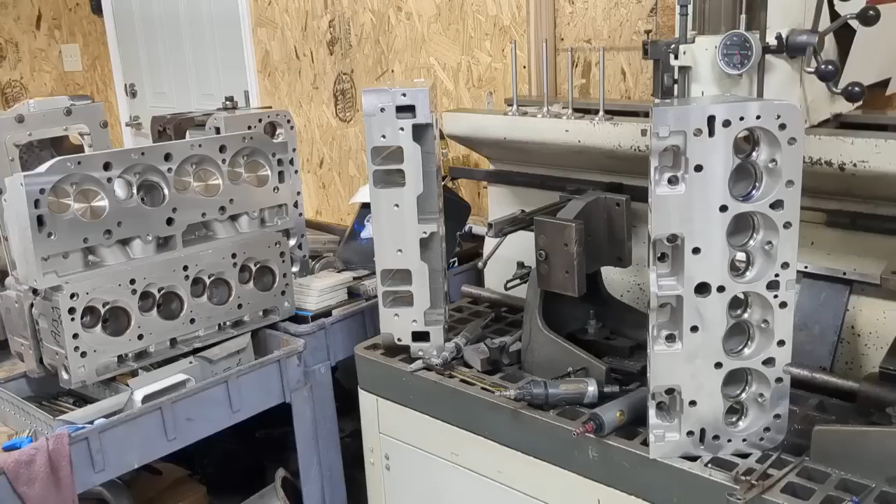This is Brian Salter here with Salter Racing Engines, and today we're going to be talking about getting serious about making horsepower. And the topic of the day is going to be cylinder heads, but mostly about the heads. We're going to be talking about valves and valve seats, and we're going to do this in a series.

Sorry about the crooked camera. I am shooting this video by myself, so I will be back and forth hitting the pause button probably.

But serious about power. Boy, I'm going to tell you, being in this business for 30 years and doing NASCAR motors, you see it all. And I have heard some stuff in the last couple of days on the internet that has just blown my mind. I think people are getting big with YouTube but lack the actual real world experience. And today I'm going to show you some stuff that's going to be very simple but yet make big impacts on performance.

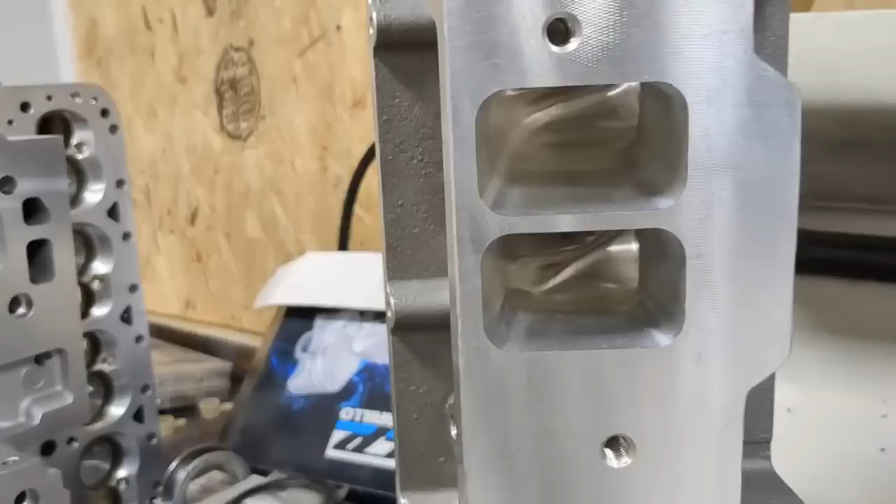I watched a cam video the other day, and man, okay, well, I got videos coming. This is gonna be part one. There'll be multiple videos in this series. So how do you get from something like this, or how do you get to something like this? Let me word it that way. You know, when you buy something off the shelf for a budget, you get something like this.

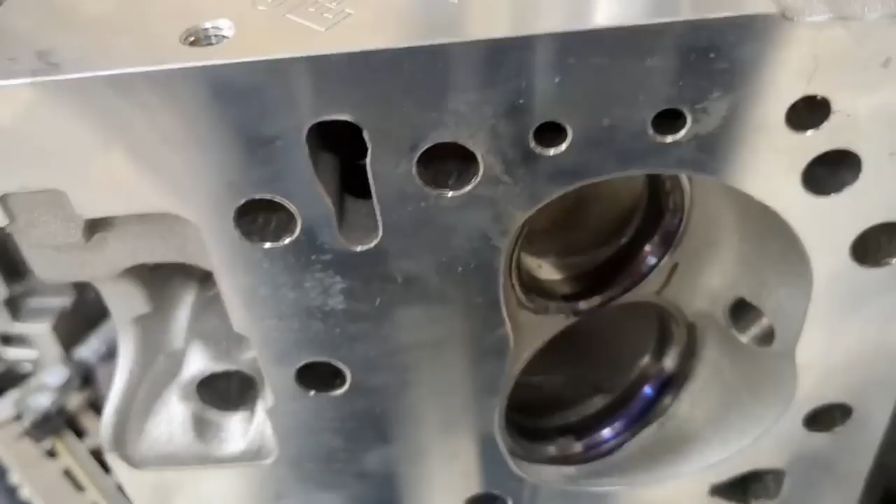After all these years, I have my own CNC programs. This is an Edelbrock E Street for a Chevrolet, by the way. I also have some for Fords, some cup stuff for D3s, big block stuff here. I've got a smorgasbord of all kinds of stuff.

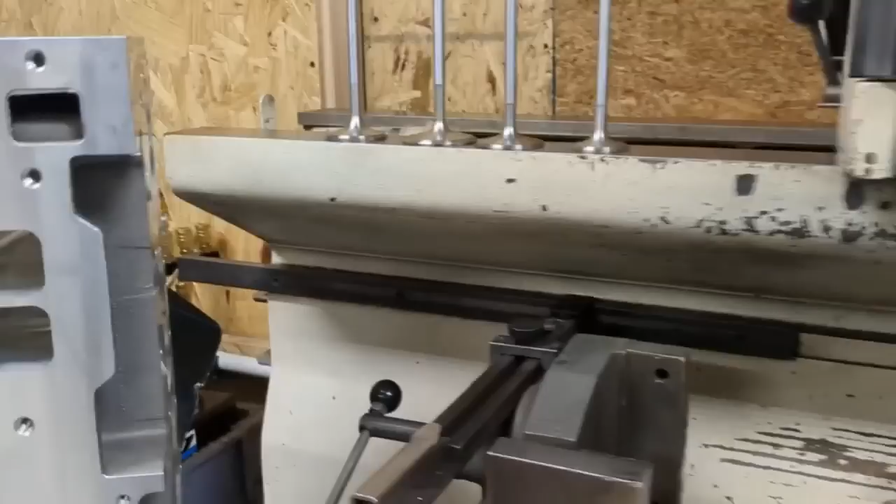I've got engines to do, nine engines right now, and obviously cylinder heads are part of that. So I'm going to show you some tricks of the trade, and some things you need to pay attention to, and some things that don't matter.

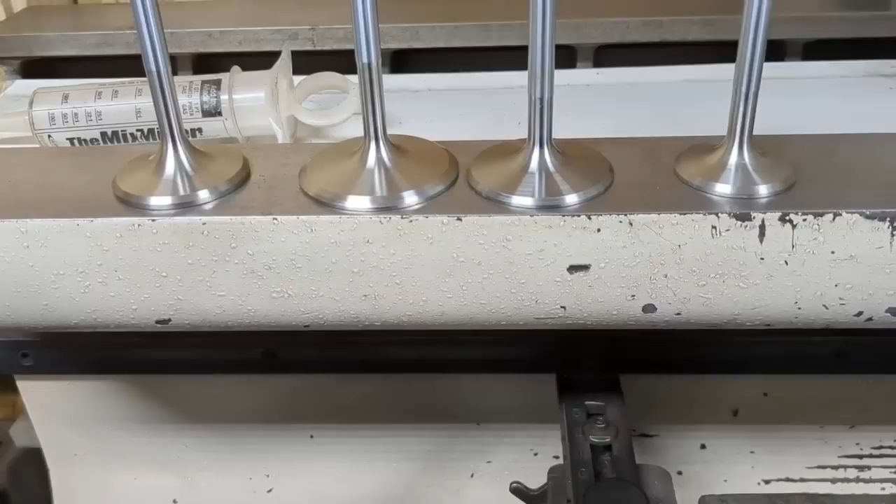We're going to start off with number one. When you talk about cylinder head porting, I'm going to give you a very good wise tip, okay? Because I've been porting heads for more than 25 years. Let me ask you a question: are you porting heads to the engine, or to the valve that's in the head? And the valve that's in the head, is it put there due to the size of the engine? Is it as big a valve as you can get in the chamber? What's the reason and the point behind your valve size?

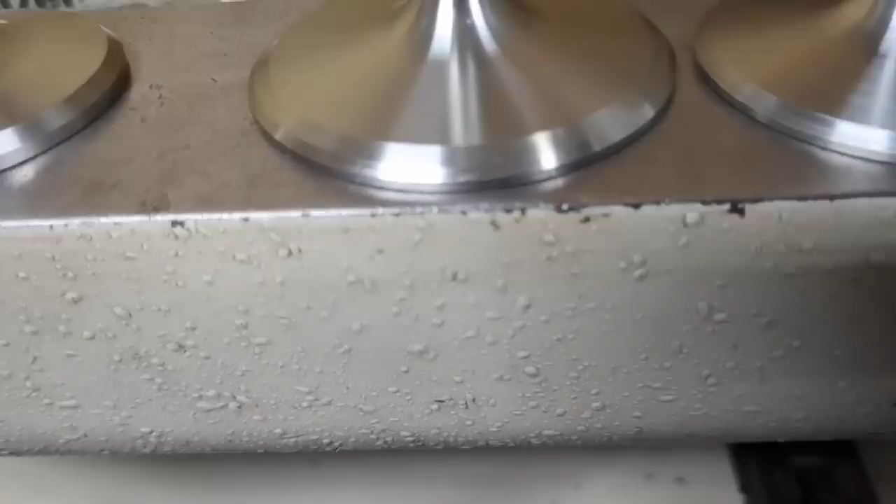These are questions I want you to ponder on. Do we do a back cut such as this one, or do we not do a back cut like that one? Do we do a 12-degree face angle like these two, even on the exhaust? Or do we do the tulip style exhaust with a much steeper exhaust angle?

Well, hopefully after this video you can make some better choices.

Now keep in mind, in order for me to take something like this that you buy from Summit or whoever, Jegs, Summit, EPW, or the guy off the street corner, wherever you get these from, how do you go from this to this?

And the answer is, if you've never done that kind of work, you don't. You have to hire someone. And if you've got to hire someone, you're talking mega bucks, okay? And mega bucks being $3,000 to $4,000, and I'm talking work, labor.

So if you were to buy a set of race-ready, all-out heads from me, depending on the head you bought, it could be anywhere from - this would include completely assembled, all titanium components with shaft systems - anywhere from $8,000 to $15,000. Then you've got to get an intake. If the intake is going to be all-out like the cylinder heads, you're looking at probably $3,000. So now you've got nearly 15 grand tied up in a small block, just the heads and intake.

And the only thing about it is, if you get it from me, you know that it works. It sets records, it wins races, because that's what I do. That's what we do. That's our goal. I build engines for a purpose.

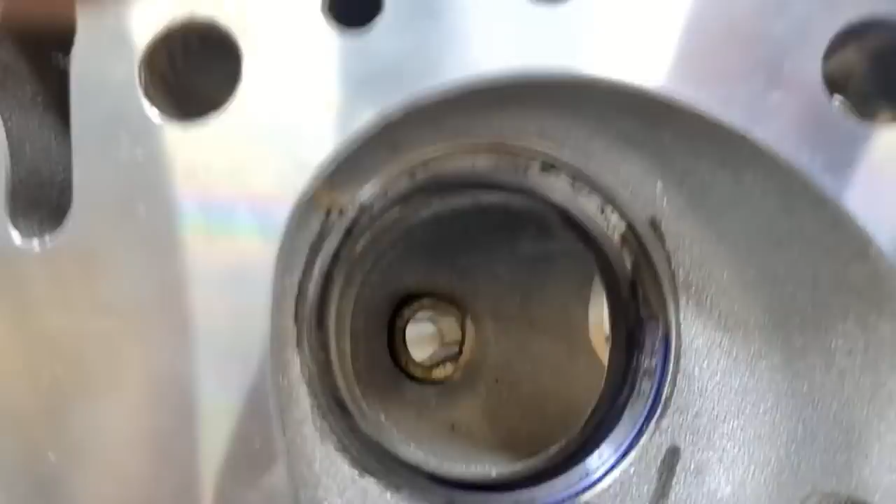Notice the casting, everybody's seen stuff like this before. And there's this Cosmoline and packing grease, all that junk still in there. Brand new stuff here. All right, so these things got potential, no doubt about it. They got potential.

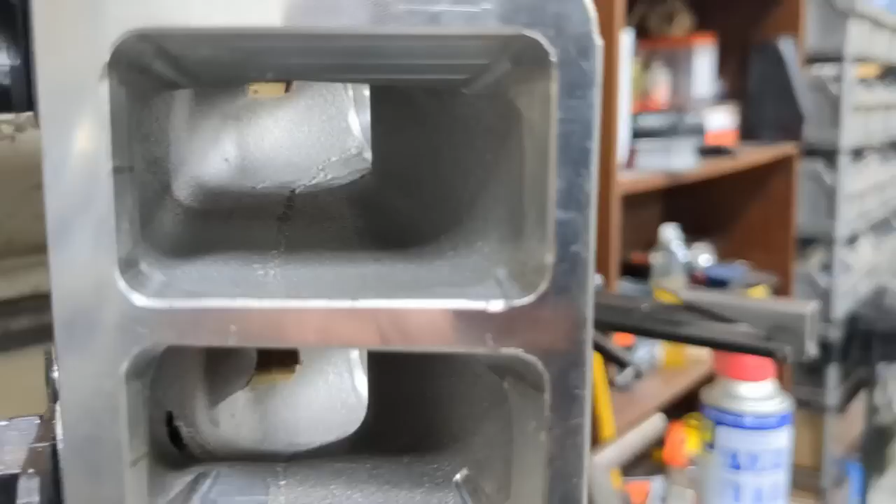And here, Edelbrock has CNC'd the entrance only, of course. This phone is really struggling to focus on that 3D look. There we go, you can see it's just barely CNC'd on the entrance. It's kind of a gasket profile type deal, and that's it. You don't even have very little push rod clearance, all that jazz.

So what's wrong with it, how will this head do? Well, this head will do great if you're trying to stay between 300 and 400 horsepower like it sits. Now, obviously, guys, you can push the limit, really crank the compression and run a different fuel, and you can get more than that. But I'm talking about easily building a 300 to 400 horsepower street engine very easily with this thing just the way it is. Very easy.

What are some problems with it? That's what I want to point out to you. All right, problem number one, let's look at the seat, right here. This is a problem. This will cause shrouding of the valve.

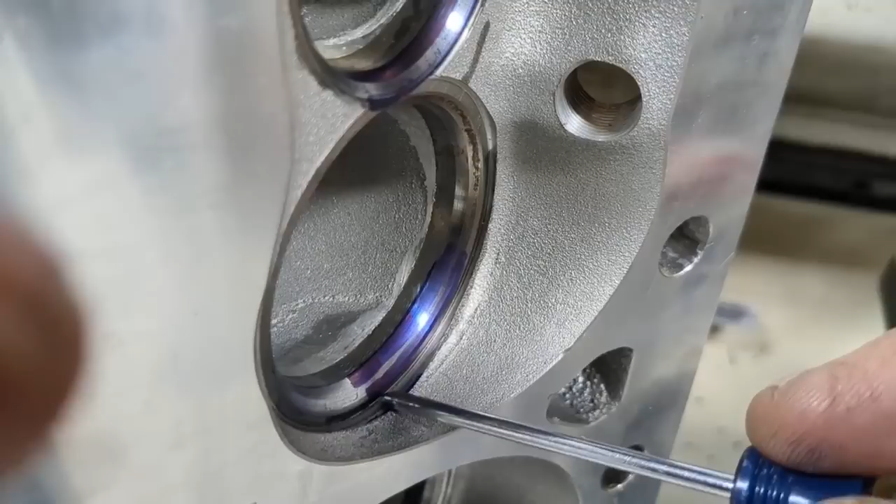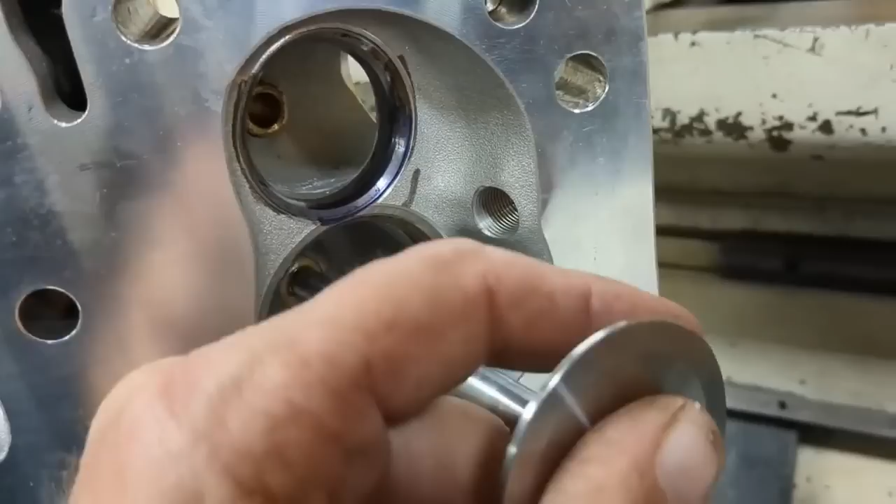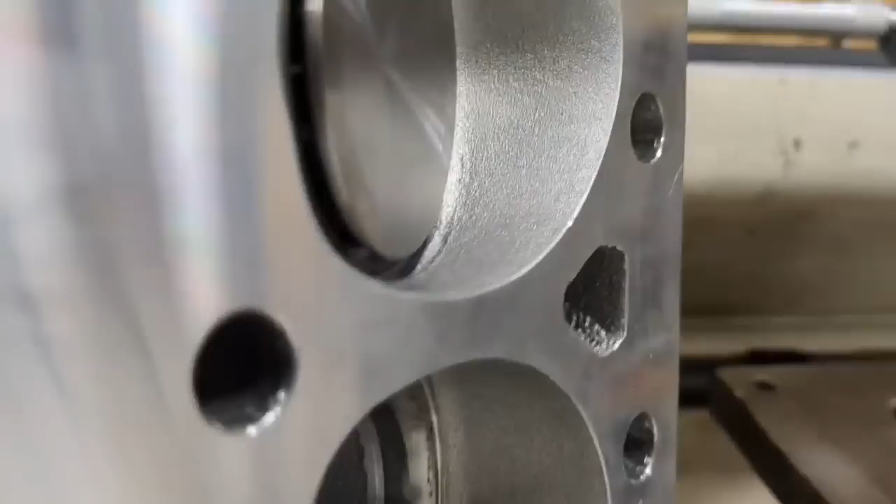Now, what is shrouding of the valve? Well, I showed you shrouding when we did the little piston video a few days ago, or however long ago it was. Let's put a valve in here. I still got the seals in them too, so they're a little stiff. Shrouding - let's just crack this open here. All right, let's get a bird's eye view.

So there's shrouding. That's some shrouding for you. What does that mean? It means it's blocking your flow.

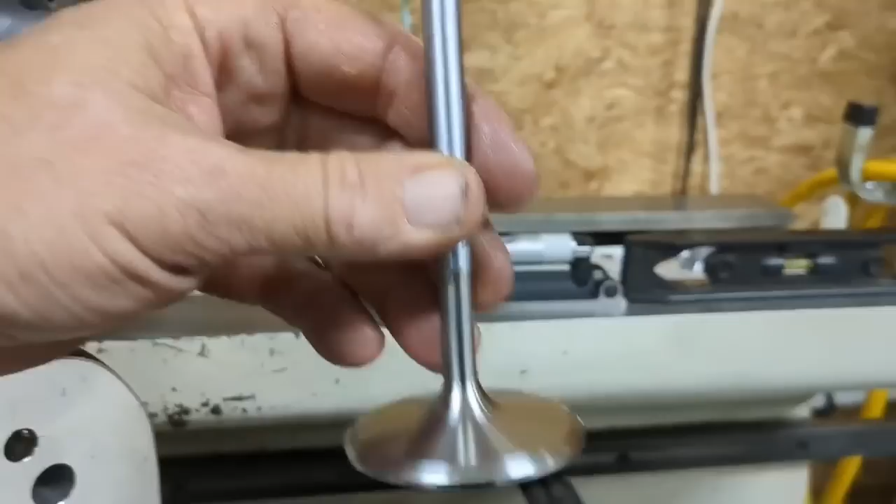It's blocking your airflow. One of the things I learned as a young man doing this was, before I got a flow bench, I would take these valves and put them underneath. I'll show you here briefly. Again, I did not have a flow bench. This is when I was young. I would take these valves and put them in a parts washer, clamping them with one of those flexible wand things you can tighten up to hold its place.

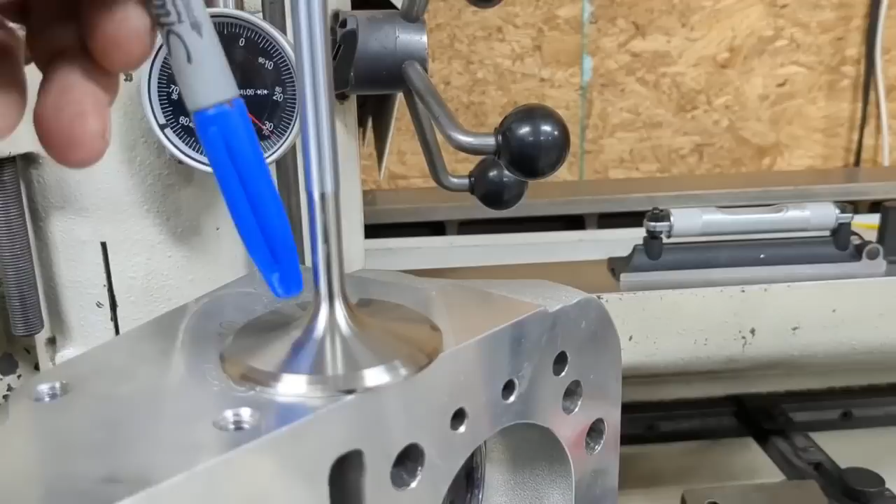I would clamp it in the stream, and the stream would be flowing. It would catch it about here and come straight down on the valve. I would see how the flow would kick off the valve.

Now pay attention here, because I'm about to enlighten you, because I know right now you think I'm crazy. This is stuff I did at 19 years old. So I had this in the parts washer stream, and my parts washer at the time was a metal tube with a pretty thin stream. It was really good, really consistent. I'd put the valve in there and watch how the spray would come off of that valve.

Because remember, what's blocking your flow? The valve. The valve is in your way, and that valve is very critical, very important. Let's set this up here, maybe we can see a little better.

Okay, so the stream would hit this valve face, right here on the stem, and I would watch it as it came off. I got to where I would grind these valves with different angles, different back cuts, different margins, so that the stream, instead of coming way out wide here, would actually wrap around the valve. I'm not kidding you. At 19 years old, I had my own valve grinding angles so that stream would literally come straight off the valve.

Now, at 19 years old—and again, I enlisted in the Army before I graduated high school, so by then I was in the service, but this was always my passion. I was working on people's cars. Whenever we could, there was a lot of hot rodders in the Army, and we would go to grudge race each other and that kind of stuff, because the division had between 15 and 20,000 people, and there were lots of young guys with hot rods.

So we'd have grudge drag races, and everybody was coming to me to fix up their car, or everybody bet their money against the other guy. Of course, when you didn't make any money, it was kind of important to win. So these are little tricks I picked up. I was grinding valves based off of the flow I got off of that parts washer. That was my test. I didn't have a flow bench, and I could not believe the results I was getting.

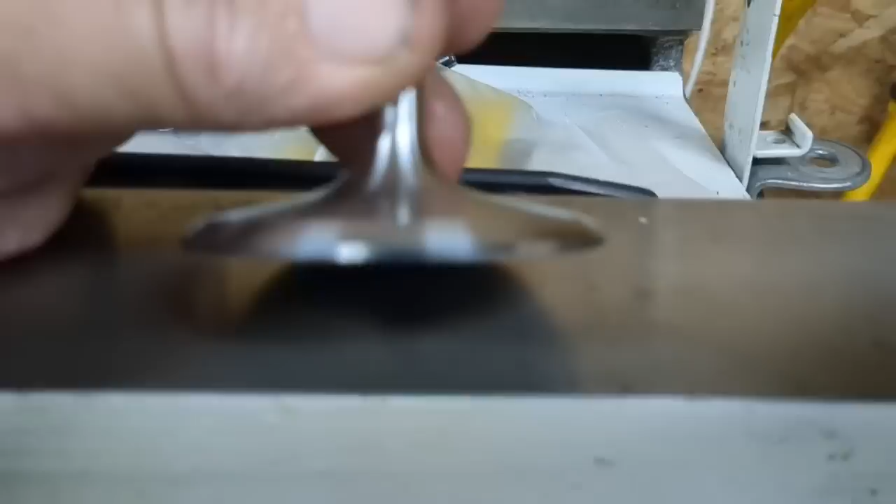And here's what I found. I found the margin—oh, I'm sorry, that's not focusing. Man, that irritates me. Okay, there we go. I found the margin was critical. Where is it? There it is. This is the margin right there. I just painted it.

That is the margin. That is a straight down part of the valve. It comes down right underneath the seat. I'm sorry, I'm moving, I'm trying to be still here. That's your margin, and that margin thickness would change my flow. But it also would change how well the heat conduction took place, and I'm going to talk about that in a minute.

So then you have the seat, the actual seat angle on the valve, which is the part that actually seals when the valve shuts. That's this one right here. Everybody see that one? This particular valve you're looking at is on a 45-degree seat, which is fairly standard for, you know, mediocre to fairly high-performance engines.

A lot of race engines are at 45 degrees. It's a good safe angle because with a really stiff valve spring, it's less likely to pull the valve up in the seat and cause it to tulip, which would end your day badly. But there are better angles—for example, 50 degrees, 52, 55, that type of thing. So you get the idea. Now, on top of that angle is what we call the back cut, and it's right here.

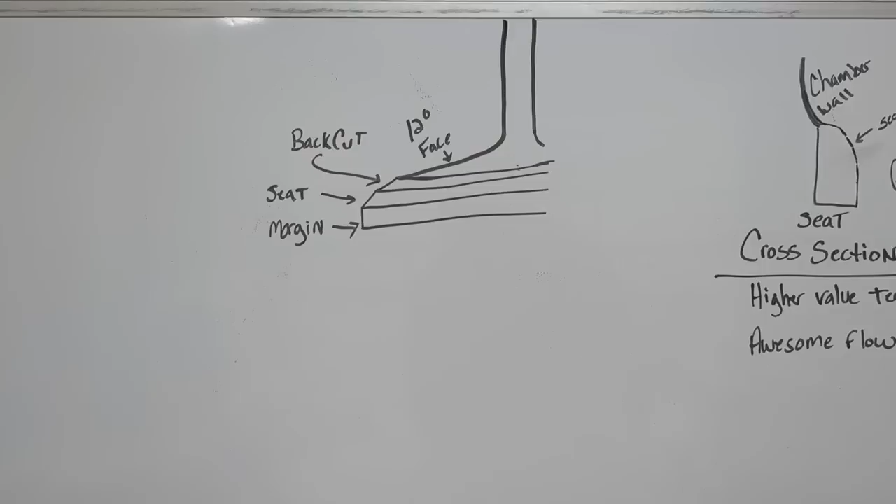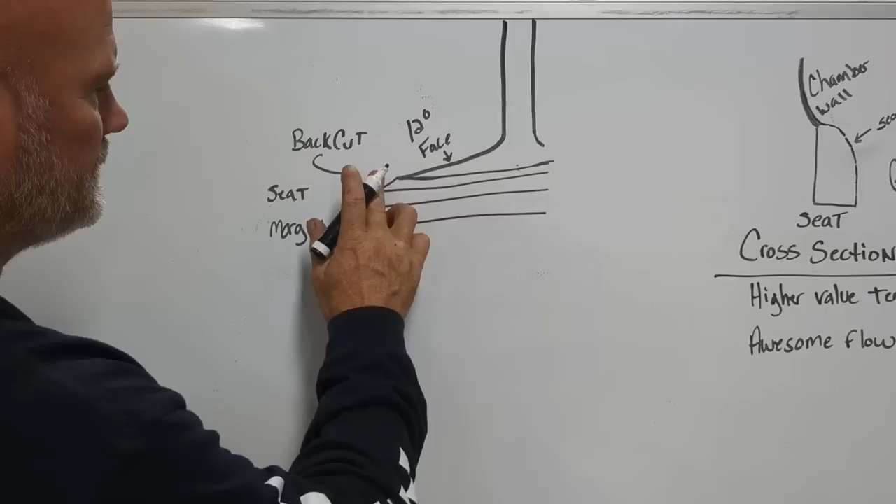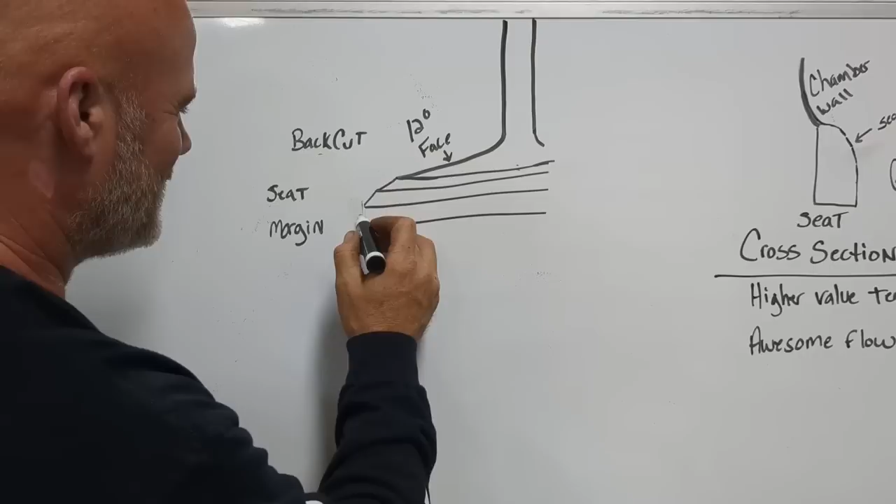So why is the valve the size that it is? Here's a better drawing to make it easier to understand. Your margin - let me move these arrows out of the way - you might want your margin to look like this. Nah, that can't be that crazy. But you might want them to look like that. I don't know, you might just want them straight.

Or heck, you might not want any margin at all. Like some of these modern cars don't have any margin at all, it's just a seat angle and there's this little tiny, hardly immeasurable margin, right? And I'm telling you right now, there's something there to be had, okay? You say, what is it again? Low and mid lift flow. When I change this, say from a 45, and my low lift numbers are not what I want, there's work in that margin to be had, okay. I'm not going to tell you what to do. It took me a little bit to find it, but I'm telling you where to look.

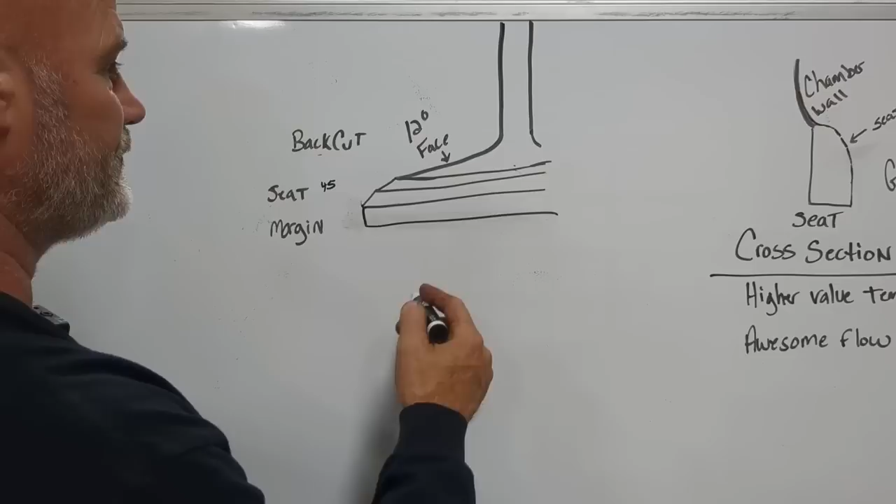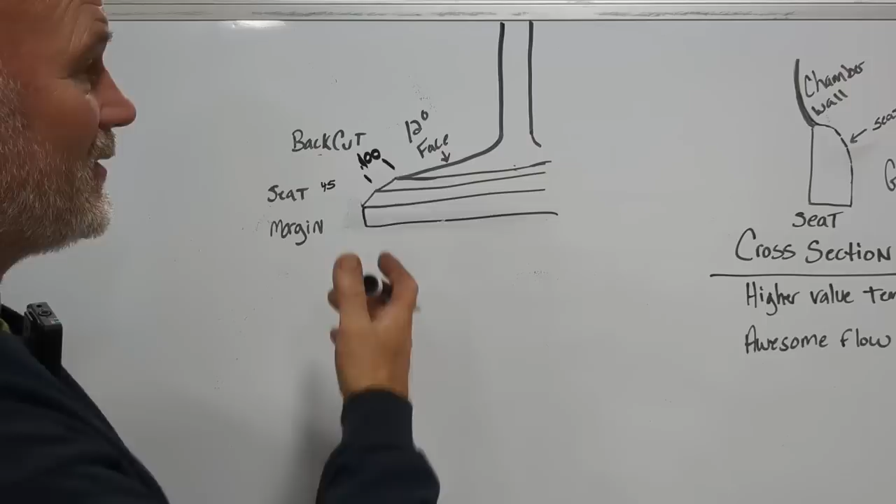This 12-degree face angle is great, don't mess with that. This back cut, I never go more than that, and sometimes I don't go that much. A lot of times I don't go that much, okay. 45-degree seat, 50, 52, right there you're going to pick up your high lift flow numbers, and you're going to lose some low sometimes. And if you do, you can get it back with a margin, but you got to work at it.

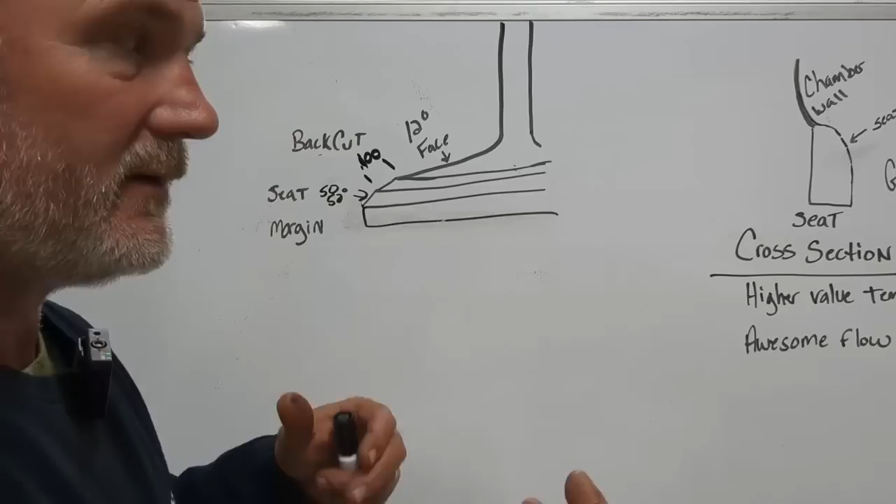Now, I want to show you another thing that's a big deal, good and bad, and the difference between a head that I do and a head that you buy out of the box. All right, here we go.

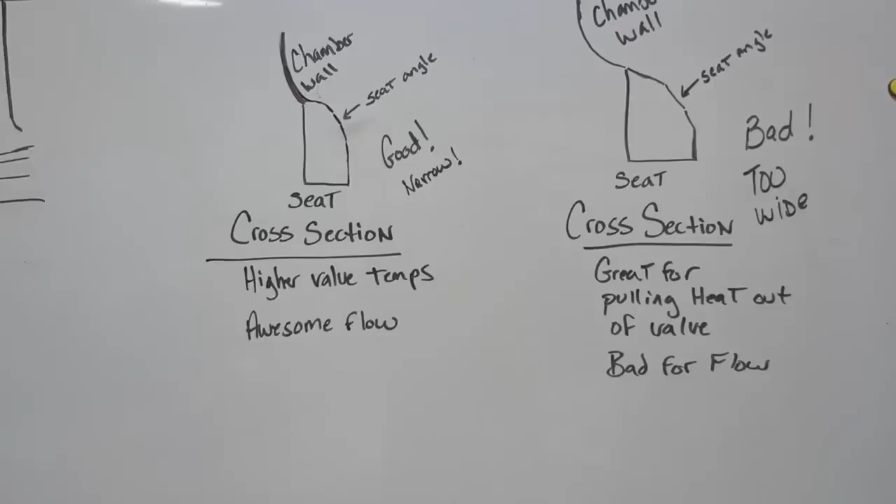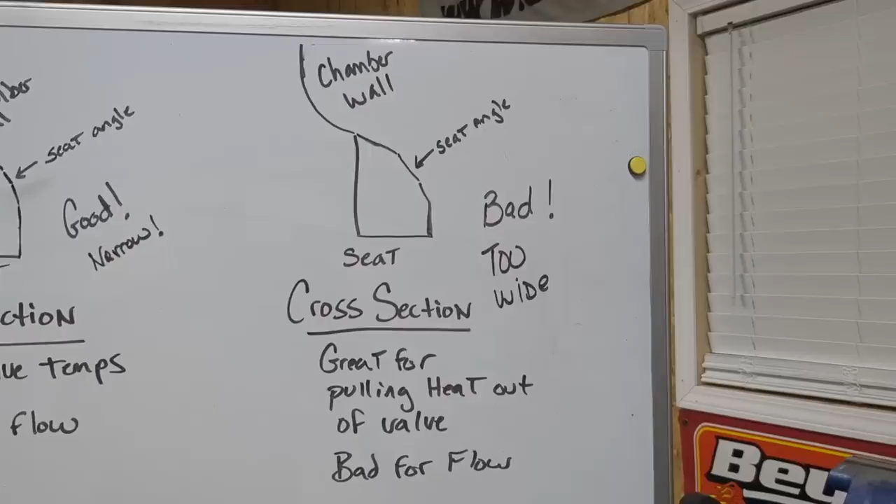Now, if you look over here, move this little thingy - I have a cross-sectional view, let's see here. Back up just a tad. There we go. Right there it says bad, too wide. Now look here what we're talking about.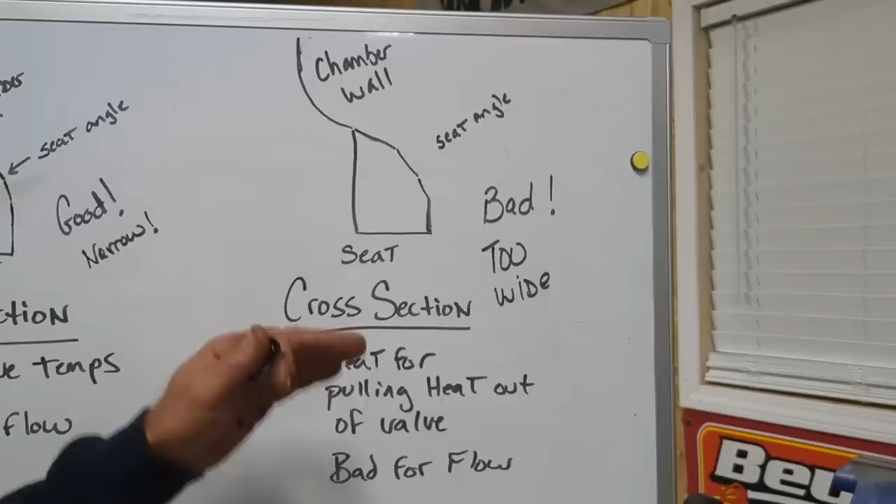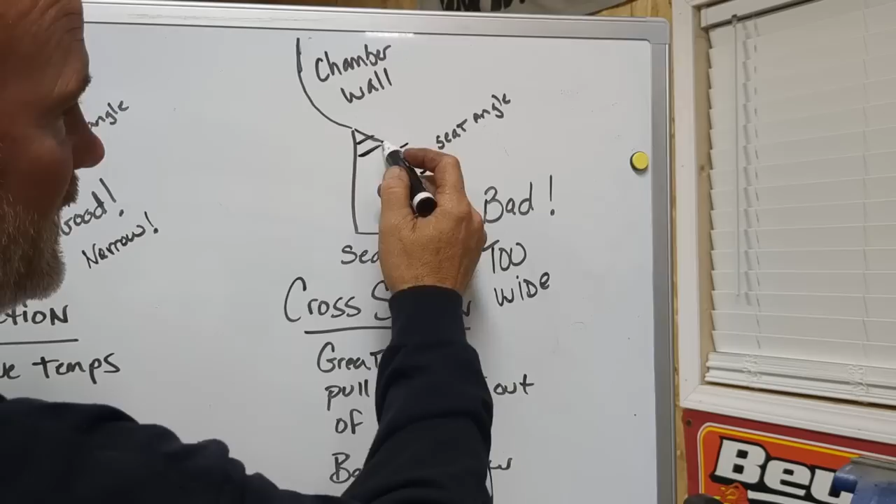This is, for example, the Edelbrock head over there, and I'm not knocking Edelbrock, they make excellent products, okay. But you have to understand, and you're going to understand why they do what they do in this section, okay - they make their valve seat angles on the seat itself. In other words, this was like the valve seat that you cut, and now you're literally looking at the valve seat as if you whacked it in half, and you're looking at the profile of that seat, okay. That's what's called a cross section.

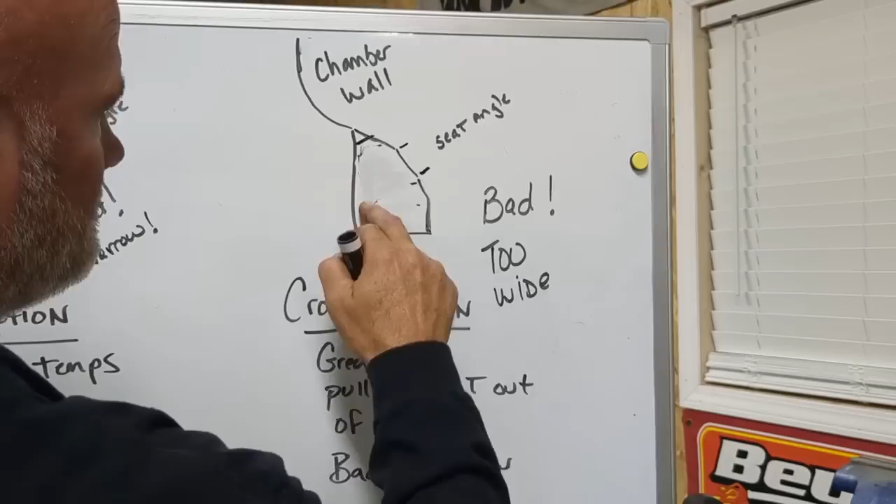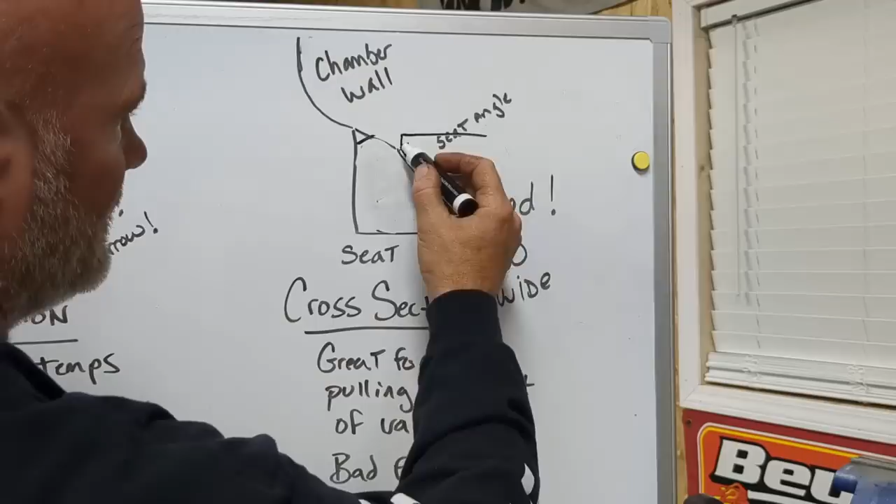So this is how wide the valve seat is. In other words, when you put the valve in the hole, the seat angle of that 45-degree seat angle over here will sit right there and meet it. And then you'd have a margin, your valve seat angle, you'd have your back cut, and that's how it was set in there. And you'll notice I put a comment, bad, too wide, okay. This is bad for what? Bad for flow. So why do they do it then?

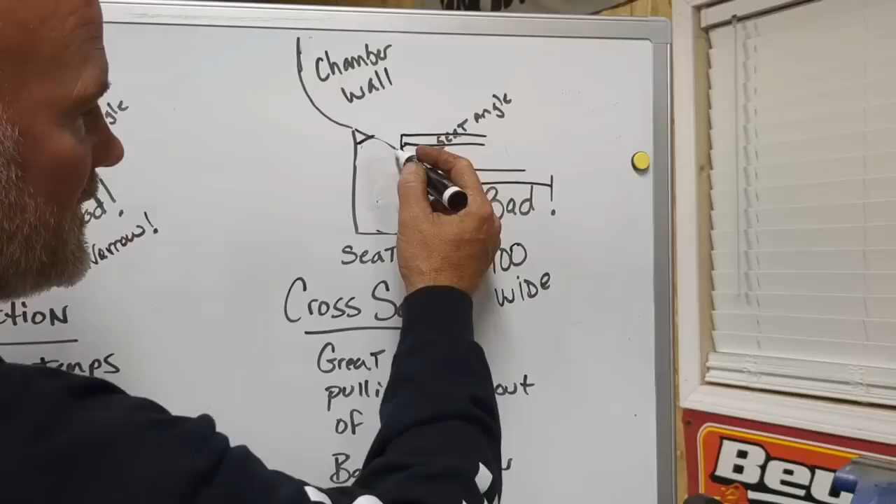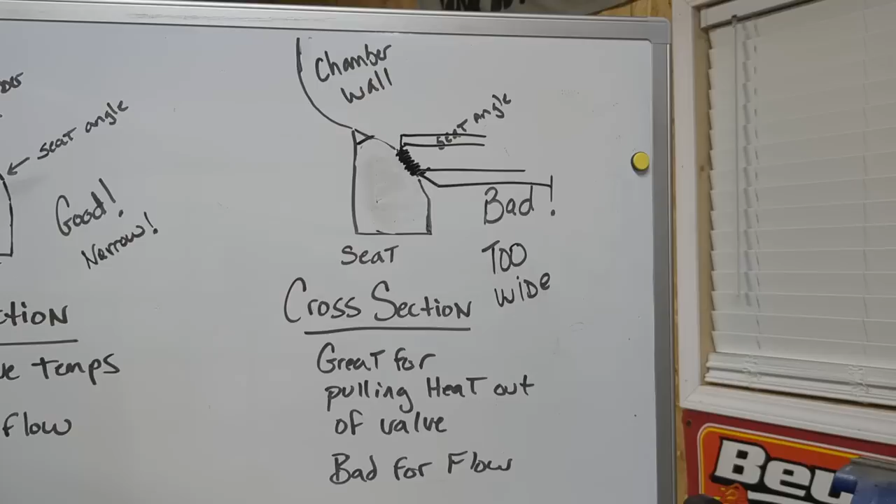They do it because of this surface contact area right here. How does that valve cool itself? Because it's riding in a guide, it gets opened by a rocker arm, and it's sitting on the valve seat with spring pressure applied to it. But how does it cool itself?

I mean, you got to remember, all inside the cylinder head here, you got water, coolant flowing around, right? So the antifreeze or coolant or water pulls the heat out of the valve train component, pulls it out of the seats, pulls it out of the head, passes it to the radiator, radiator emits it to the atmosphere through airflow, and then the cooler water gets back into the engine. How does that valve cool down? It cools down from surface contact right there.

These companies cannot send out cylinder heads with the way that I would do it on a race engine because they have to make sure that cylinder head lasts an amount of time. They don't want you burning valves or overheating things and causing the seats to fall out of the head because of overheating. Now, by the way, let me say this while I'm on the subject - if you ever have seats installed into a cylinder head, an aluminum cylinder head, you make sure they put them in at 7 thousandths press.

Every seat I install goes in at 7 thousandths press fit. Every one, and I never have one fail, ever. Make sure any shop you use does that.

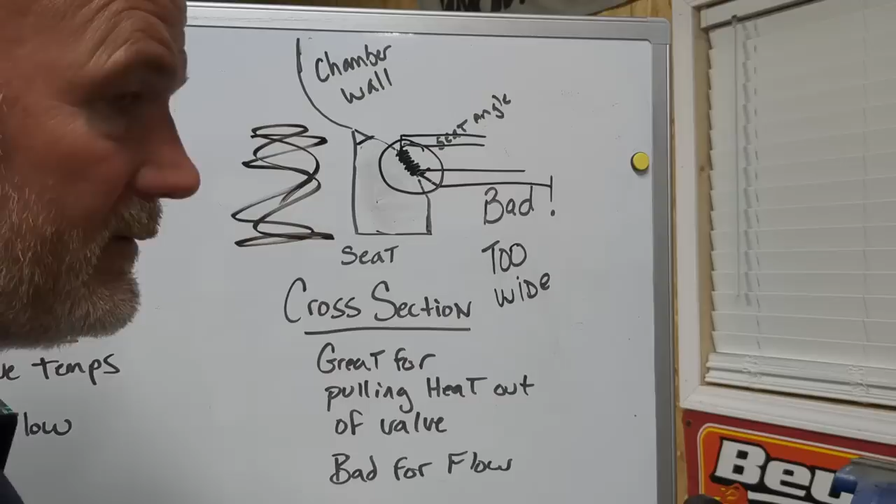But again, for all-out performance, we're trying to get all we can out of it, I don't care about that. We know we can turn them 9,000 RPMs for 2 hours. And if you're drag racing, your little few-second pass does not even compare to running 9,000 for 2 hours. So it ain't gonna fall out and hurt nothing there.

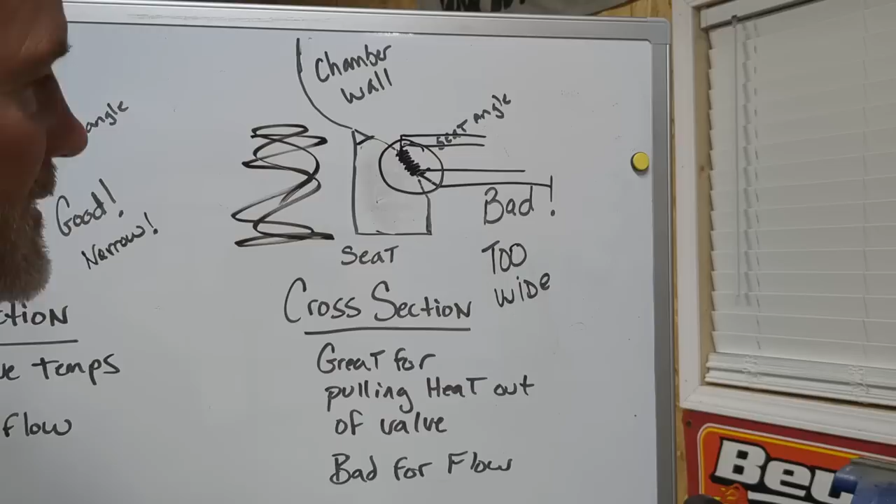Plus a lot of times people are running nitrous and other things that actually cool the stuff down, so it's not that big a deal. But they make the seats wide so they'll suck the heat out of the valve and cool everything. It's not good for cylinder head flow though, because the valve has to travel too far to get good airflow by there.

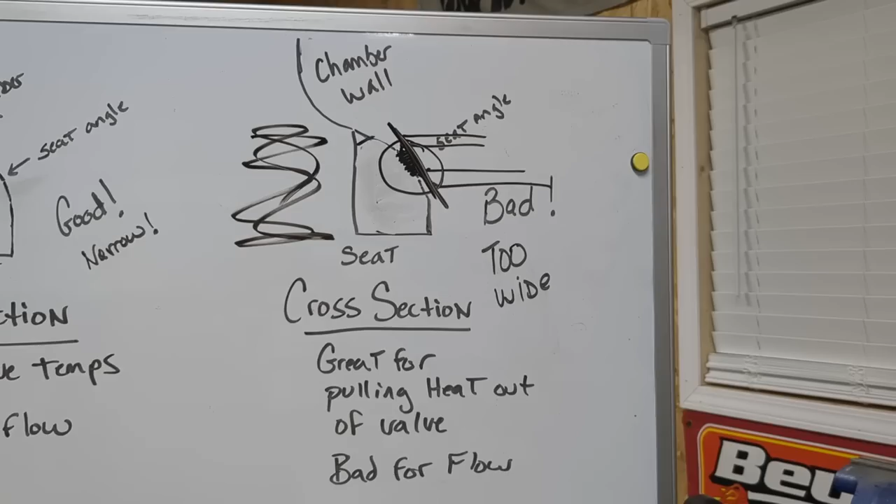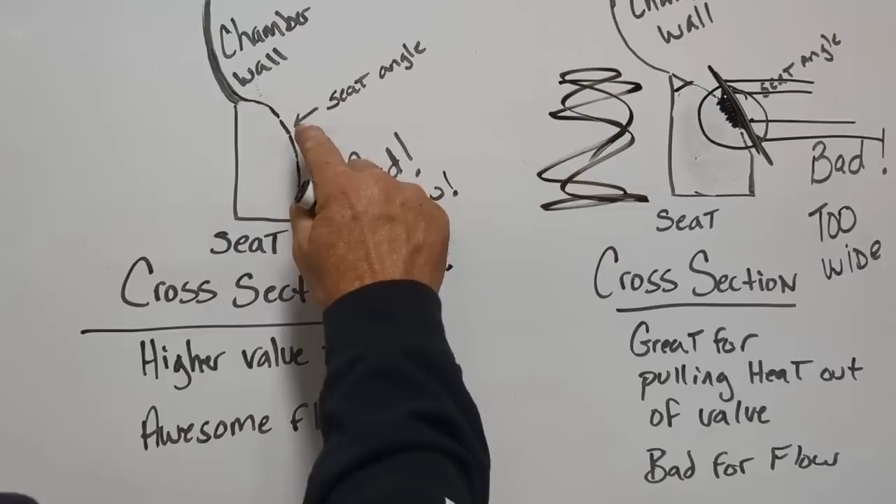Let me look at my camera. If we took that wide seat angle and moved over here, and narrowed it down to only this much, now the valve does not have to travel very far to start flowing air and fuel. It just cracks off the seat and it's pulling a lot of air and fuel immediately. But with a wider seat angle, it has to move further to do the same amount of work.

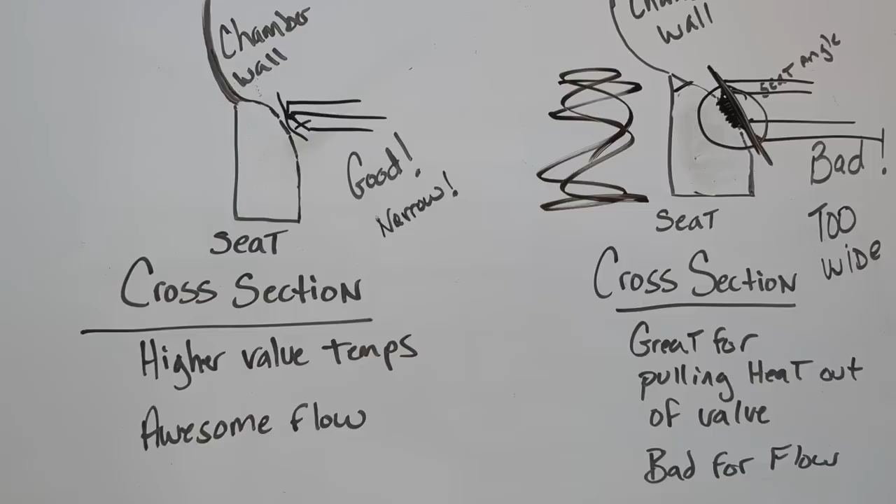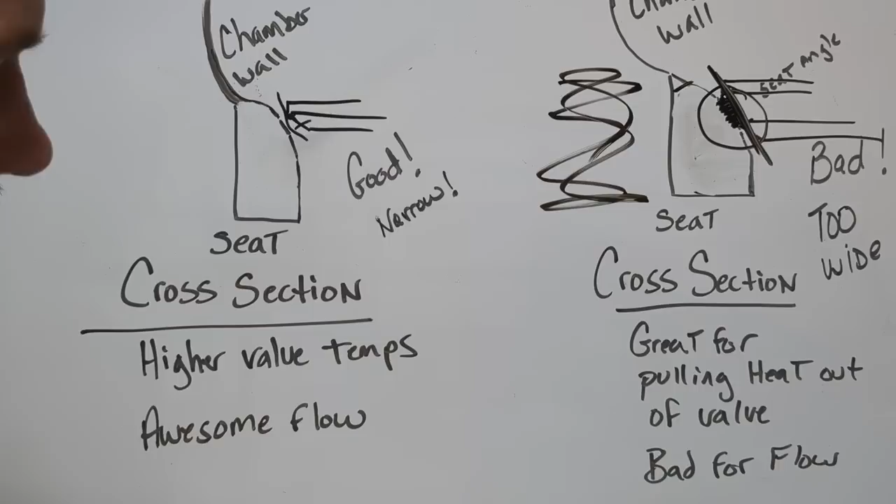So if I can start my flow numbers very early in the lift, that's just going to make more power for me. I also heard a guy say, in an older video, that if you flowed your head and it only flowed up to 500 lift, then don't lift the valve more than 500. Okay, said no race engine builder ever.

Why? Because of the time the valve is at max lift. Watch this now. Let's say the head flowed, and let's say it's an old junky iron head, and it flows 210 CFM at 500 lift. You know how much I'm going to open that valve? 550, all day long.

You say, well why? Because it ain't hurting a darn thing for me to be at 550, and it means I'm going to be past 500 a lot longer. So I'm going to take advantage of the maximum flow I can get out of that head by exceeding that number. If my head only flows up to 500, I'm going to lift it at least 550.

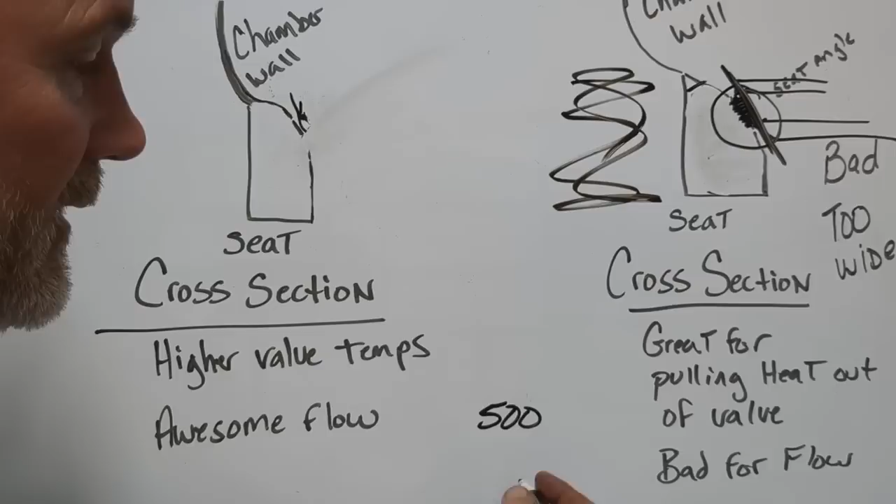And everybody I know, the best in the world, is going to tell you the same thing. Don't listen to anybody who tells you otherwise. And if you don't believe this and you're an engine builder, don't write nothing stupid in my comments. Go home and try it, and you will find out that I am right. You know why? Because I've tried it.

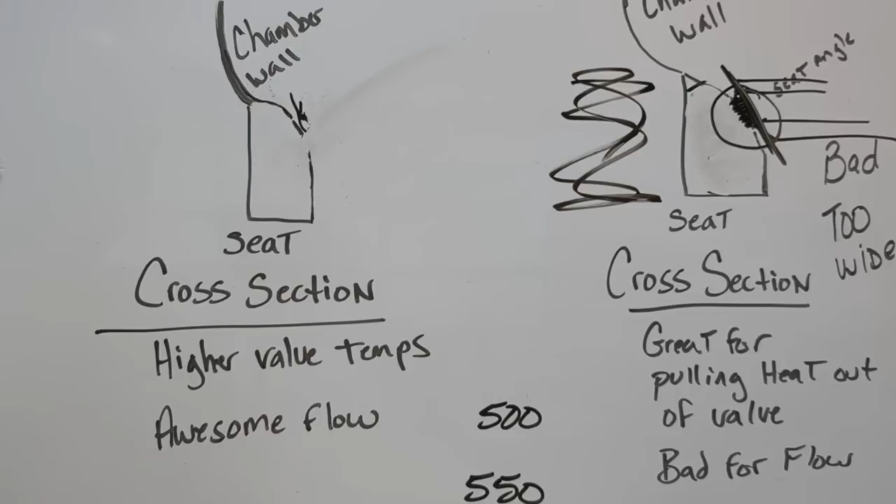Just like when I saw someone say air-fuel ratio doesn't make that big a difference. What? Guys, 2 jet sizes changes horsepower numbers. Just 2 sizes changes horsepower numbers. So either there's something wrong with your test, or the carburetor you were using is getting fuel from somewhere else, because they can do that, or you don't know what you're doing. You change the jets in that carburetor, you're going to see it on the dyno, or there's something wrong with your dyno.

Period. Ask anybody who's really serious and does this for a living, such as me. You ask them, they will tell you, yes, it does, a big time does. Now, getting back to my point here.

Now, one thing I will tell you about 2-barrel carburetors, guys, if any of you run 2-barrels, they run hotter cylinder temperatures than a larger carburetor. They do. So every once in a while, you want to keep it from prolonged periods of idling, especially if you're on the dyno, making sure you're goosing it once in a while to get that fuel squirter to dump the fuel in, because it cools down the cylinder.

If I'm doing a cam break-in on a 2-barrel engine, say it's a very high velocity engine with a 500 2-barrel, one that we've had worked and it flows more than 500, but it's still a 2-barrel—if I'm doing a flat tappet cam break-in on it, I will goose those things every minute, just to make sure I'm getting gas in there to cool down the cylinder temps, because they do run hotter than, say, a 4-barrel.

Okay, so it's not really an issue, is it? So then why don't they take the time to cut the seats that way? Other than this reason, I really don't know. Now, okay, Salter, so you talked about that. Well, why don't you show us what it looks like? Glad you asked. Hang on.

All right, so one more time. Let's look at this. This is stock out of the box. And let's see, let me get my angle—right there's the seat angle. It's very wide. I don't know if this phone even shows how wide that is, but it's very wide. Out of the box. Now here's one that we do. See the little line? That's about 40 thou wide.

All right, now, does it matter? Yes, it absolutely matters. It absolutely matters. Back cuts matter. Valve seat angles matter. Stem size matters. Obviously, the smaller the valve stem, the more flow you're going to get.

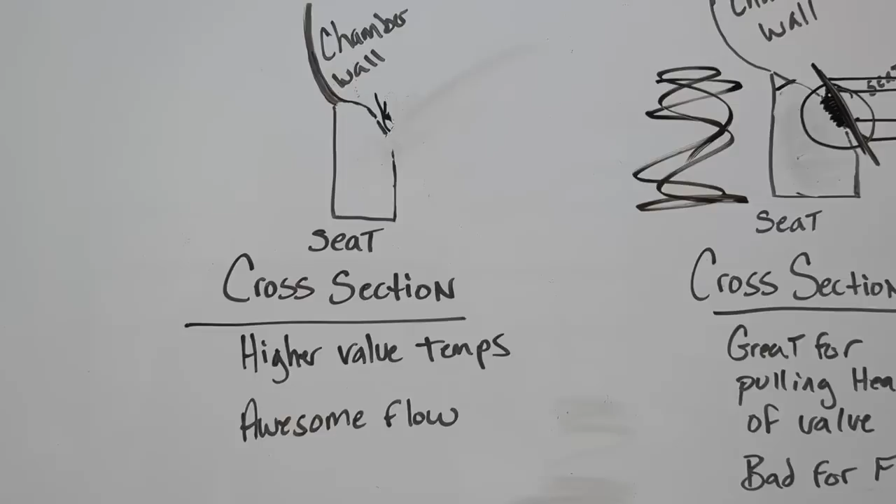I spent years, guys, absolutely years perfecting my cutters. I have, I don't know, probably 10 that I developed. I have what's called an optical comparator. Basically, it's a big gigantic screen that blows up the profile of whatever object it is, and you can measure radiuses and angles with it, and I would use that to develop my valve seat profiles. And with Mark Smith from PME, Pro Motors out of Charlotte—he's passed on now, but back then I did some tests with him, a very well-known NASCAR engine builder.

And I have some very good valve seats due to that experience. So you got to work at it. You got to work at it. Goodson has the ability to make those for you. So all you have to do is send them a little drawing on paper, say, hey, make me a tool that I can cut the valve seat at this angle, and they will make it for you. Or you can get with somebody who's already got it done, and they already have very high flowing, well known for their work, and just let them do your heads.

Now there's a lot to this. That's why this is part 1. If I actually broke down every single detail, it's probably going to be about part 20 when I'm finished. Because we're going to talk about chamber work. We're going to talk about porting and blending. I'm going to show you about porting to the valve size.